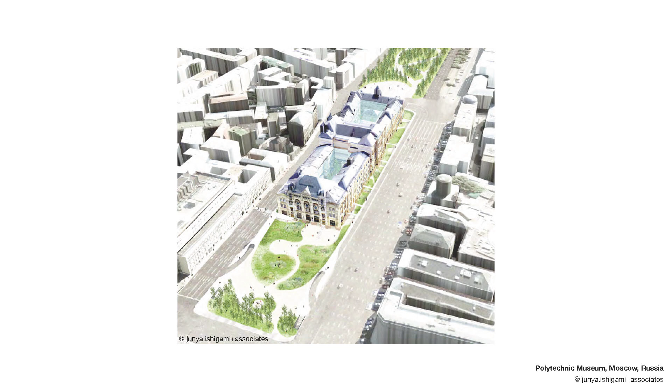So in 2013, I came for the internship first, because of the Polytechnic Museum project, since Junya won the competition in 2012. At that moment, I was mainly interested in urban design. This proposal was probably more urban than architectural — it was connecting the garden and extending it under the museum. So it was very unique.

I thought this was a very unique design proposal for the city of Moscow. I was interested in how this person designs such a thing, his vision, how they design such a thing. So I applied for the internship, and had an internship first in Moscow for 1 month, working inside the museum, and then 2 months in Tokyo. And this is the office when I came to the office.

Okay, so you see it's me, and this is Kei, and this is Ishigami. And in the office, the main work goes through the models. Basically, every project is designed through the models.

That's why you see there are many big scale models for different projects. At that moment, we were just 3 interns, so our main work was to help staff design and make those models to explain the project. This is the Polytechnic Museum model, which I was working on during my internship. This is design staff, and we were trying to design inside the model while completing it, and at the same time discuss with Ishigami. So lots of model making was during the internship.

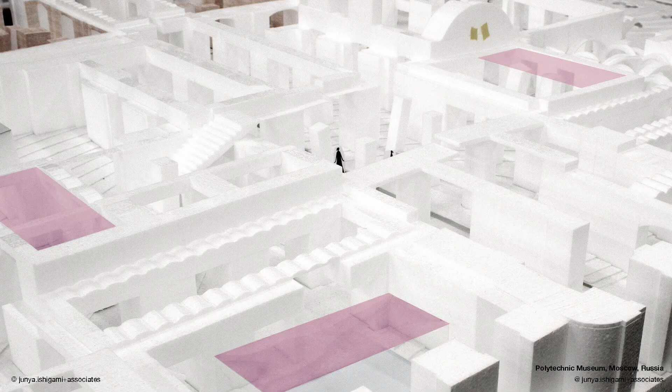The models are very precise and detailed, so we can also use them for the client to explain the solution. Also, I think it's important for Ishigami to design through the models because we see it more real compared to 3D modeling - since the eye is not focused on the back, we see it very much like we see the actual building. It's also very easy to understand your design and if it's good or not.

Then the second project I was working on was also a model for the exhibition - it's another project which Kei will explain later. We were making the model, not small scale, made out of paper with some plants on top. We also delivered it to the exhibition space.

Then my internship finished. I went back to Moscow, finished my master's, and in September 2014 I arrived at the office already on staff position. My 5-year period in the office I split into 3 stages, so it's more clear for you, and I think it was kind of going step by step up. The office right now - I think I'm the longest international staff working in the office - so I think it was a good opportunity to see different processes.

First, every person who starts in the office begins with a competition. I think competition is a very good chance to show what you can do, and also to see how design works in the office. Ishigami-san always judges - he really sees what a person can do, what their design sense is, what is good to offer them for the next project, and so on. So for me, it was a chance to show my best.

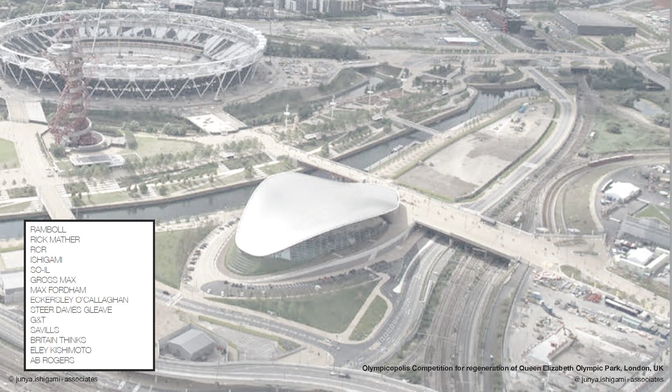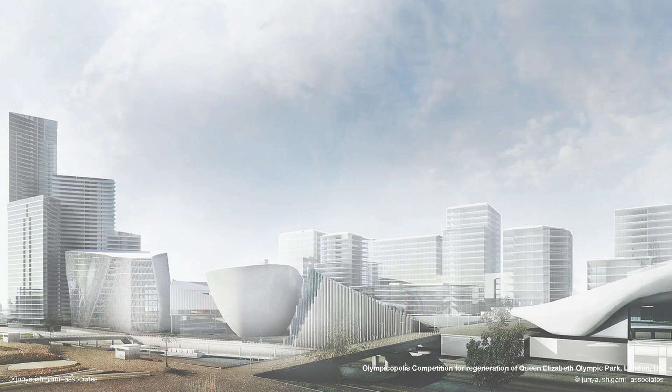Unluckily, my competition was very big - we were working together with several architects, including RCR, the Pritzker winner, and Sou Fujimoto, and Rick Mather was our British partner managing this competition. The competition was for design in an urban area. Several architects were designing buildings - we designed a gallery, RCR designed the museum, Sou Fujimoto designed the university, and there was a big residential area. We designed this small gallery space. We submitted and didn't win, but we succeeded in the submission, and Ishigami was very happy.

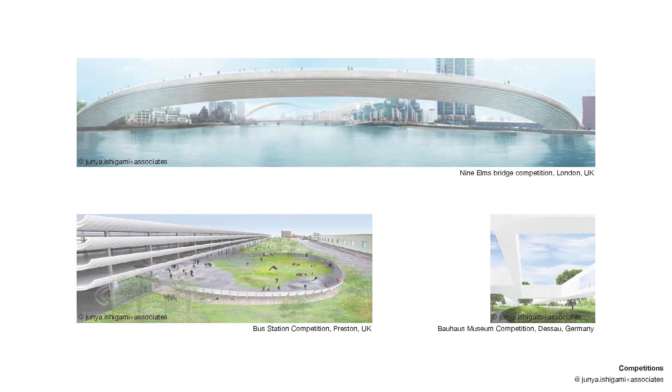For me, probably it wasn't the best way to make it good, because after that Ishigami pushed me into many other competitions, especially some that weren't under my control, but he put me in order to deliver to the final stage. So maybe in the first year, we completed around 7 competitions. Competition after competition was a very hard period, I think the hardest one for me, and the whole office didn't sleep and so on.

But I think the good point is that I always understood competition is the only chance to design something you will probably never design otherwise - for example, a bridge, or a renovation, or a museum. Of course we never know what our private projects will be, but competition is a fast way to design and try to understand how things can be created.

Then another project, already probably in the 2nd year, was the exhibition in GA Gallery. GA is a publisher, a Japanese publisher - they have something like Project Russia in Russia. They have a gallery space, and they publish a magazine with current architectural projects every month. So they select several architects and have an exhibition.

Ishigami presented his project, a Denmark pavilion - a very big space on the water. My team made this model, and we delivered it to the exhibition, but also designed the exhibition space. This was important because presentation models are another level for the office, and Ishigami-san cares very much about quality - it should look like a building, but at a very small scale. Everything was important, like making the building reflect in the water, since it's on water - it's acrylic and semi-opaque so it reflects the building. So many details. I also learned how to make final quality models for the office, and we published the project - my first experience making a publication for a magazine about this project.

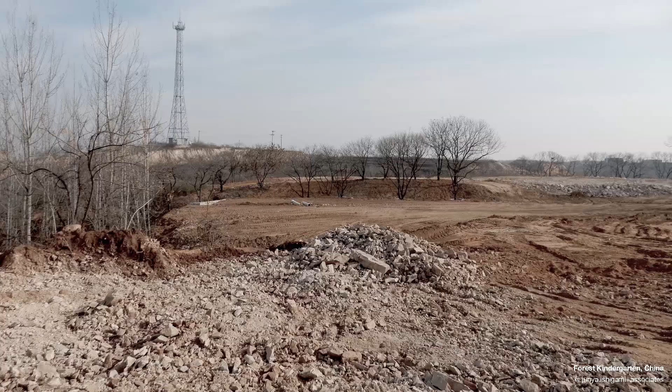So I'll explain how the design process works in the office based on the kindergarten project. This is the site. Usually any project starts with a site visit, because seeing the site is very important - to see the scale, the environment, and for Junya, it's important to understand how to put the new proposal inside the environment, how to merge it together. But in this case the situation was different because it's a new development area and a very, very big part of land - nothing happened yet, they cut all the trees, so it's just the ground.

So we didn't really know what to do in the beginning. But for any project, Ishigami never draws first. It's good because he asks you to propose - you're the staff with a team of interns, and everyone starts to propose. Every day we have a meeting and propose around 100 options, then Ishigami-san refuses them all, or something like this. Then you try again, and he chooses some direction. For just a meeting with him, we present the plan as a more or less draft arranged version, along with the model, because he really sees more in the model. It was a lesson for me that drawing doesn't present as much as models - models have some craftsmanship mistakes, but sometimes these mistakes are good because the shape becomes better, not perfect - not made by machine, made by hand, so it presents well.

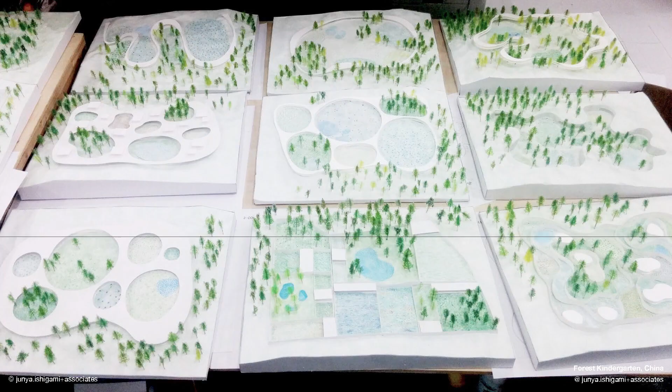Then we presented 17 options - here only a few - for the client. He chose some, but at that moment, together with Ishigami-san, we started to think we wanted to design the building for the kids, not looking like a normal building. I think any kindergarten is designed by adults first, and second, it has the same architectural scale as any other building, so it doesn't really create something for the kids. So we wanted to challenge that and make a space specially made for kids, very unusual for adults.

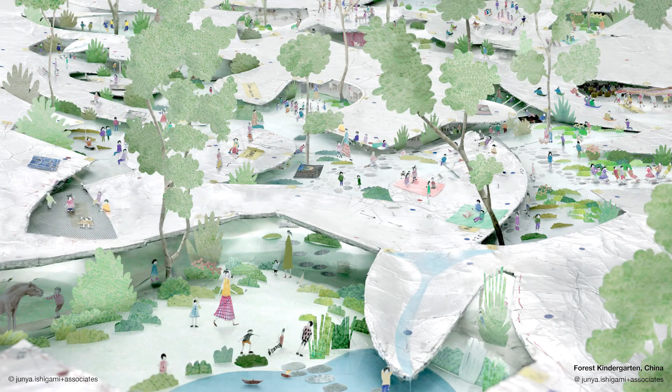But then we were trying to find the shape which would be playful for the kids. At the end, yes, we found the final shape. So this is the final shape, and here you see the image presenting what the project looks like.

So we wanted to make a roof very playful, and you don't even see the interior spaces, but they exist. The roof uses the rainwater, so there's a pond that appears, there's a net play area, and many different places, all mixing in the kindergarten.

Last year, the office had an exhibition at Fondation Cartier in Paris, and we joined this exhibition. My team and I presented the kindergarten project as well, showing collages, first roofs, study models, and then the final model in the central space.

Then I think the last period in the office is the supervising period. It's also when I started to think about maybe leaving the office, but more about finding the next step. In this process, I started to have many new staff who I had to educate to handle different projects. For example, Cafe Paris or the Jewelry project, I was just supervising as a project manager, but staff or interns were delivering the presentation to the client or going to the site and so on.

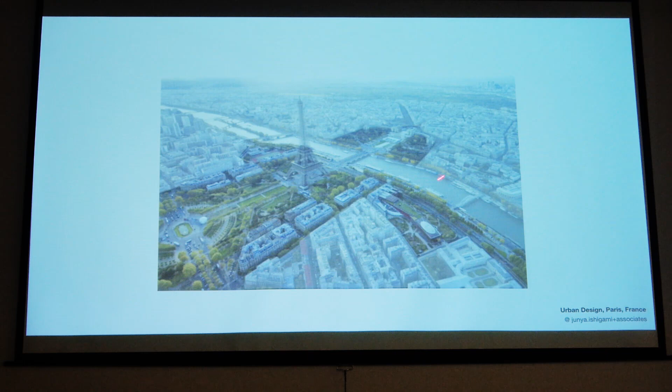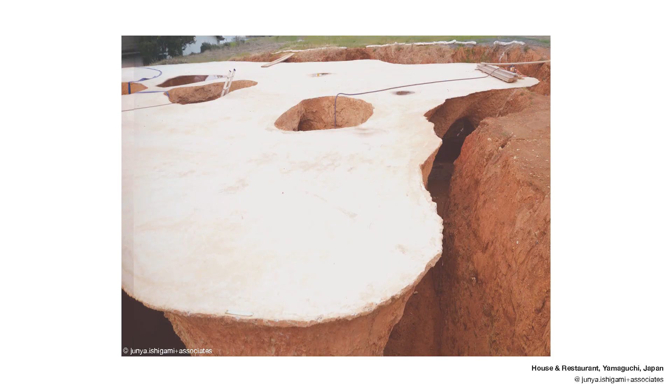And then I think I'll pass the word to Kei. He'll explain more from a different perspective. I think my perspective is more about project management, managing different competitions, international work, and his is more about the practical experience in the Ishigami office.

In my 7 years at the Junya Ishigami office, I joined many projects. So today I'll choose several unique projects from the office.

This project is the house and restaurant. The client is the owner of a French restaurant, and he's the chef. His family's house and restaurant is this one, and it uses a very unique construction method.

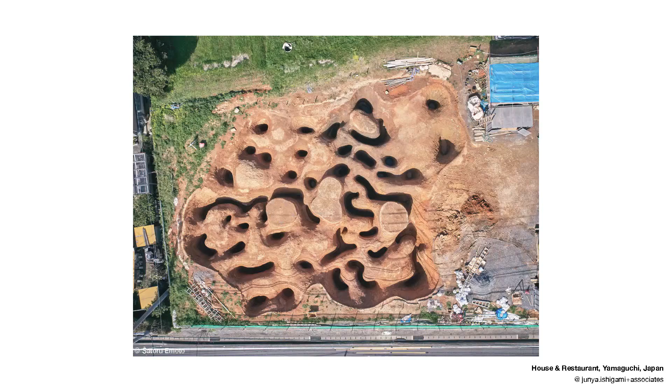So first we dig the soil ground and fill with concrete, then dig out the soil. This is the interior perspective, so all the surface of the ground is reflected in the concrete. It's a very unique concrete building.

The client's request was first that he wants it to look like an old building, like a winery in France. We proposed this ancient but new building.

This construction was very hard because we designed the soil. So I joined the construction site and also joined the digging. I talked with the contractors about how to dig and how to make a good surface, and which soil to keep and which soil to make smooth. So it was very hard to control that construction site.

But at the same time, it was a very good experience for me to join this project, because we cannot imagine what's happening at the construction site, but we had to concentrate on the design at the same time as the construction. So we noted many things at the construction site.

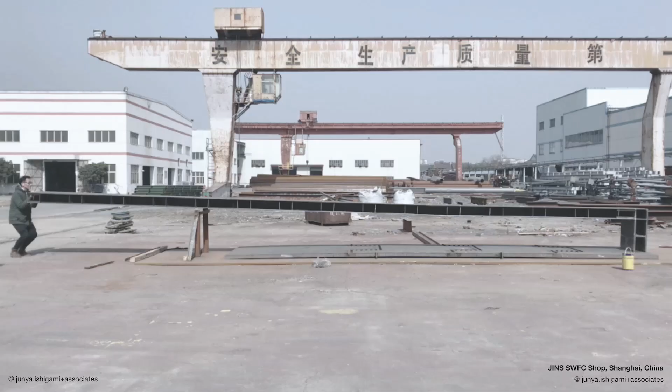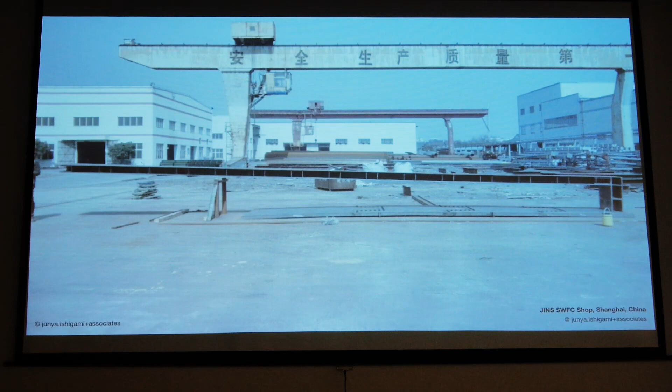So this is the wall supported by the cantilevers, and in this project we check it by building a one-to-one mock-up. In China we asked the contractor to make the one-to-one, and we check how the structure works well and how to make the smooth surface.

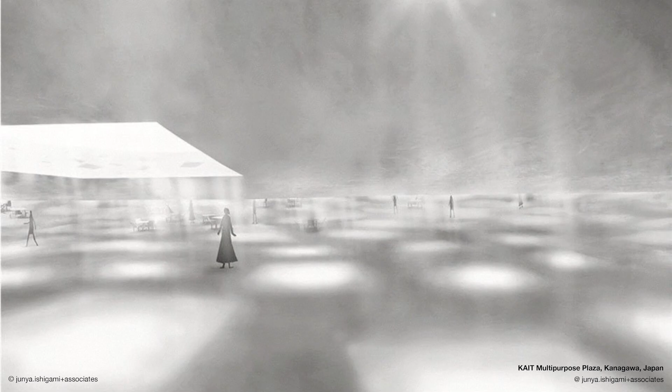And this project is the Kanagawa University Plaza, located next to the KAIT workshop, Junya Ishigami's project. This project is about 100 meters by 50 meters, with a 12 millimeter steel roof without columns. This structure is also very hard because there's no column, just 12 millimeter steel, supported by the surrounding wall.

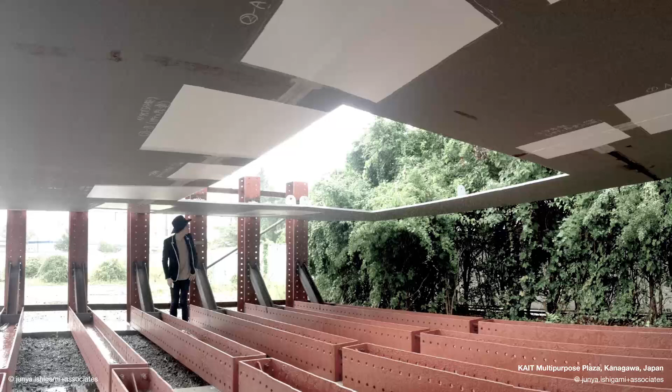In this project we also made a mock-up, and we checked the finishing surface, how the welding works well, what kind of detail for the opening edge, the lighting conditions, and the rain, how the water drops on it. Junya also visited the mock-up and discussed with the contractors how to make the shape more smooth.

So 2019 was a challenging year, because working with Ishigami office is of course very challenging, but at the same time I think we started to realize both of us had very different experience in the office. It became very beneficial to start thinking our own way, because Kei's experience is very detailed and construction-side, and mine is the opposite. So we started to think about why we should join the office together.

Also, in Ishigami office there were many cultures, and Ishigami always asked us to design for different contexts. I think right now we have to design spaces for different values, since all people request many different things, so cultural values are also important to mix into the proposal.

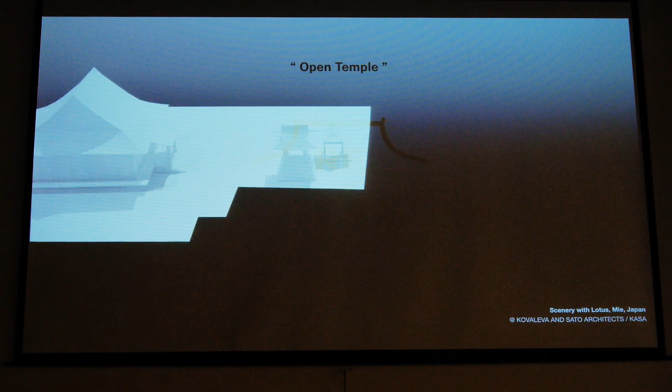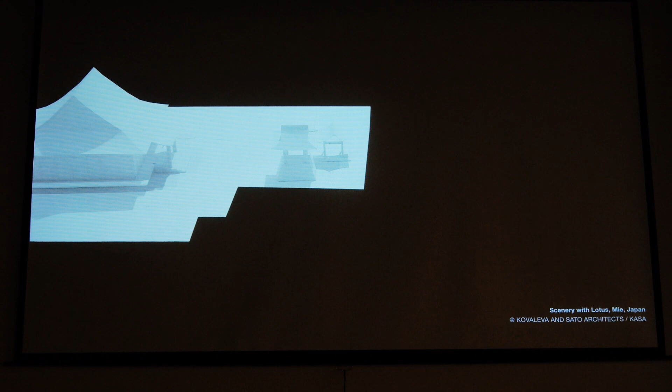Here you see the existing temple. Each Buddhist temple in Japan has a gate—it's a symbol. Now the client, in order to promote the temple, organizes different activities, like yoga in the temple, a kids workshop, and other things. But no one comes who doesn't already know about it.

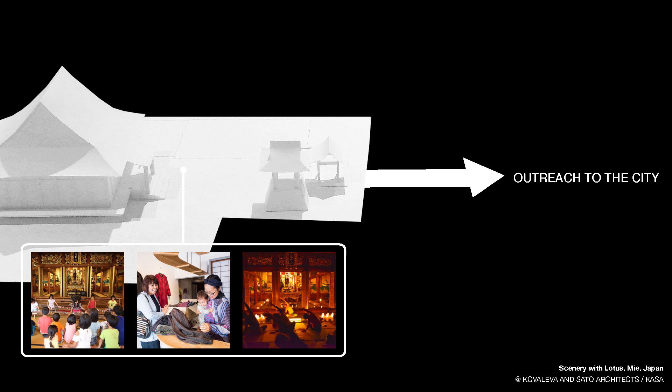He's really concerned about that, so he decided to extend his activity into the city and bought a building located just in front of the temple. He wanted to use it for different activities not connected to the temple, like a cafe, library, or guest house—something very open for the city. This building also faces a very old historical road and is on the way to approach the temple, so it's a very important location.

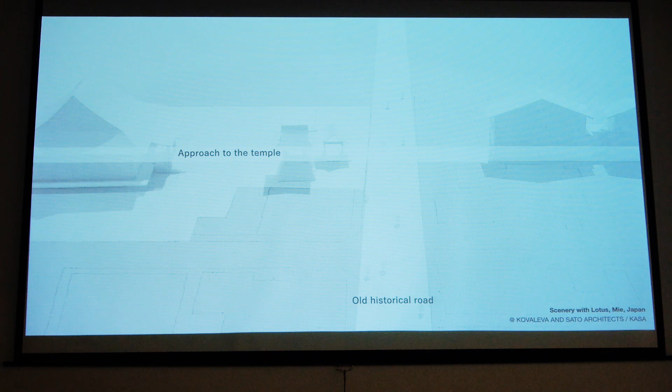Our site was actually very small, just in front of the building. The client came to us saying, 'I want to design something that people will understand is related to the temple, but also something people will like as a space.'

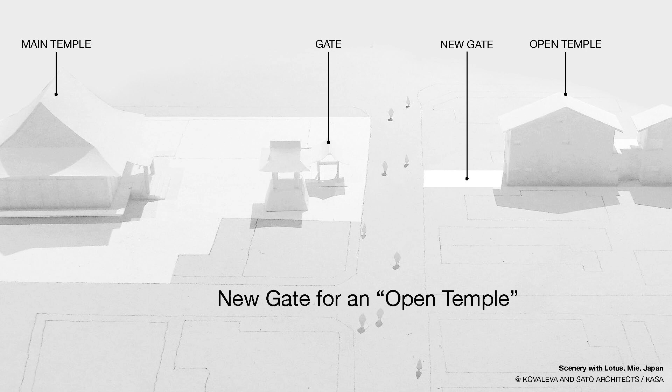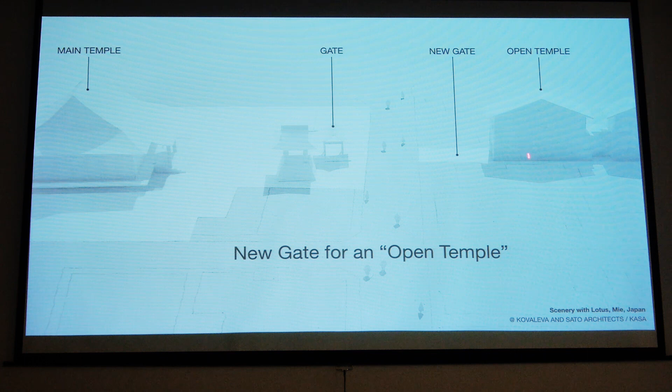As I said, the temple usually has a gate, a symbol for the traditional temple. For this new temple, we decided to design a kind of new gate, but as a pavilion—a symbol for the new, open temple. In this moment we faced two issues: we had to create something symbolic for the temple, which was important, but not too religious, while also making this new space something anyone can use and anyone can see.

So our project, called Lotus, is a pure scenery. Why Lotus? Because the lotus is a very religious symbol for Buddhism, and it also has a very beautiful shape. Also, for me as a foreigner, there's the image of Buddha with the lotus beneath him. So the lotus has a lot of meaning, and for Buddha it represents a space.

We decided to design our architecture not just as architecture, but also as scenery. So if you see it from the temple, the pavilion looks like the scenery of a lotus. For the temple, it becomes not just architecture, but a new image or new symbol. At the same time, when you're inside it has a space formed by two roofs joined together, and you can see it repeats the shape of the gate and the temple, becoming the same architectural language as the temple.

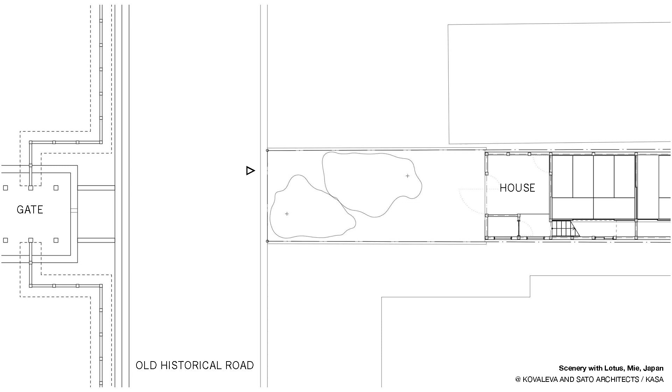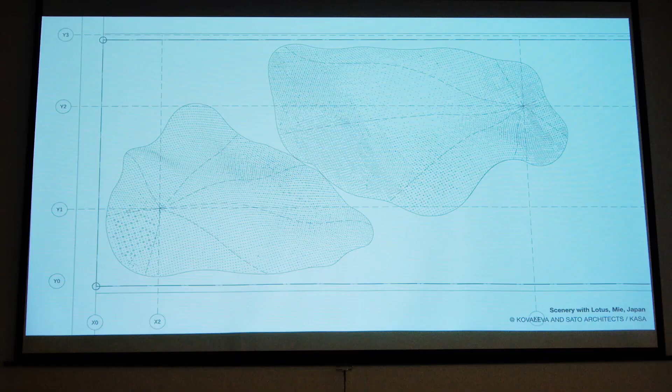For example, above the seating space, the holes are very small—only 2 millimeters—so water doesn't get in, but light still comes through. So it looks like stars when you look up with the light.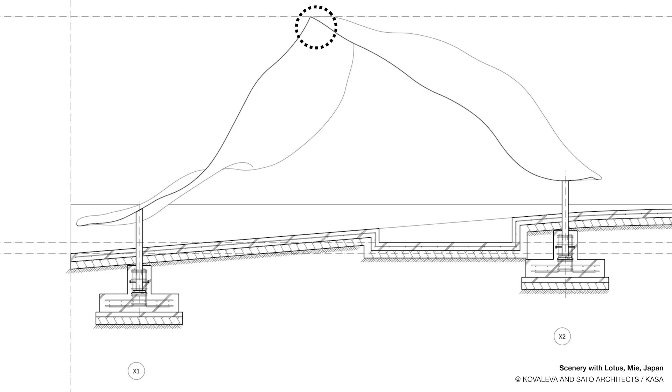And the highest space is 4 meters, with strong light coming from the opening itself, only 1 point. It was important for us to design this roof very light. In Japanese temples there is always the curtain and the entrance which has a very light feeling. So we wanted, in order to make this perforation, the building to not be massive. And also the light which comes in is more like light in a forest, so when you are under the temple, under this roof, you are covered with light.

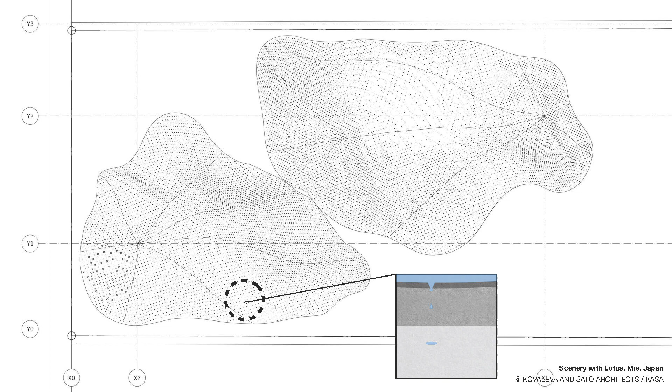Another space is where the water stores, same as on the lotus, we collect the water and then drop by drop it's coming down.

And also if we see from the new building, for now there will be a cafe, but different use. So first we also have this peaceful scenery protected from the road, but then it's more like a landscape scenery from the tatami space.

And structurally, the first principle was about folding the piece of paper and shaping it so it becomes very strong. So it's 4 millimeters aluminum and an 8 centimeter column supporting it. It's two roofs joined together.

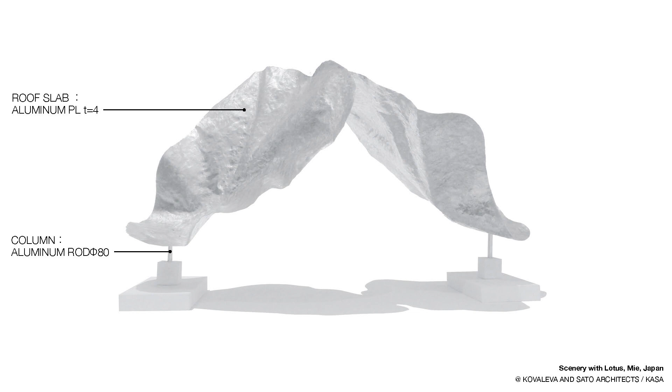Structurally, where wind comes, it works like a mountain structure. And then where the wind is not that strong, only a cantilever helps to support this roof.

For the design of the halls, we generally work with a structural engineer who also works with Junya, Jun Sato, and he's crazy, he can do such things I never imagined could happen structurally. So if you have some crazy ideas, be sure he can manage to find the structural solution.

Structurally, the way we make it is also kind of unique. There's a fast train in Japan called Shinkansen, and it has a very big mouth, the nose, and it's made by a machine which folds it. So we also use the same method.

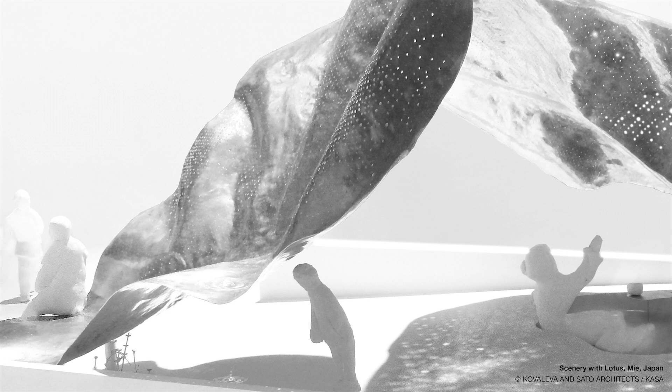But in our case, we first cut aluminum, then punch in the holes, then by machine, but also by handcraft, we shape each piece, and then we join by welding and sand it. Then here you can see the overall image of the pavilion with all the lights and the details.

Then, the SD review we just completed last month, so it's an exhibition. I will explain. The SD review is the award founded by Fumihiko Maki 40 years ago, and it was mainly made for having the...

...discussion for the architects in the moment when they still design the project. I think many architectural exhibitions present the complete works, so it's more about your result. But there is no exhibition which, same as a university, you present like a midterm studio, then you can change something, but more like architects. So we never know how architects are actually designing, because I think every architect has a very unique way to design, so it will be interesting to see. That was the idea of Fumihiko Maki, to make this exhibition and then also a publication of each project.

So every year, around 300 people apply. There are no restrictions, not so many. Only your project has to be actual, you have to have a real client, and then it has to be not built yet, so on the way to deliver. Then 15 people are selected as finalists, and the 15 people have the exhibition in the very center of Tokyo, and then also in Kyoto. This is the opening day when we opened the exhibition, and then Fumihiko Maki presented each finalist.

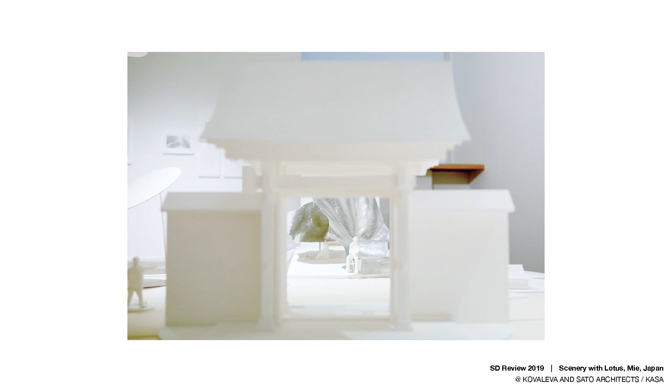And then the structure, one-to-one, and so on. So for us it was challenging to design, to make the story inside the space. Here you see the concept model of the lotus pond and the Buddha, and the site plan with the temple and new pavilion, the wall, and the view from the gate, because that was also very important to show to visitors, so they can actually look down and see how the pavilion looks through the gate.

And then also the shadows and the sitting space, the structure model. There were two models, one-to-one, presenting the quality of the light. The first one, as I showed before, like in the forest, and the second one is very unique, just like one drop on your hand if you place it under the low part.

So that was a good experience, I think, because as self-architects we are very young, but we could show our project in the same space as people who have much bigger experience. So it felt important. And I think for young architects it's very good, in order to show not only how you design, but to see how other people design.

Then Kei will explain, we have a second project as well. It's right now in construction, and it's a housing project.

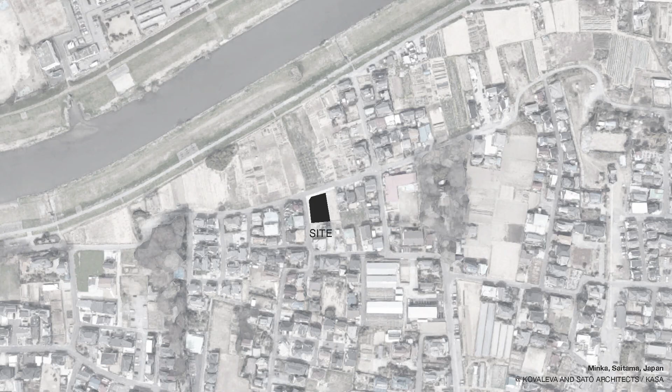Minka project. This is the site plan. The site is in the Saitama area, one hour from Tokyo, not really a city area. Here is the river, and we see the rice field and farmer area and the forest of the shrine, and this is the site. The site is actually quite big for the residents, the housing.

This is one block, so six housing units are here, but this is our site. It looks like a one block scale, so it's very large.

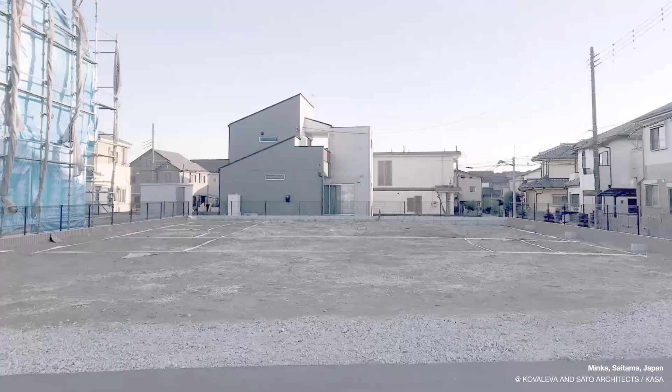When I visited the site, we wanted to make the housing, the land, as a building. And the client requested something with an old Japanese atmosphere. The client works in a lifestyle, a farmers' lifestyle event company, and they want to import that activity into this house.

So we first researched the primitive farmers' life, like how Japanese people were living in the house. The left one here is the warmer area house, basically the south area in Japan.

So there the floor is elevated to release the humidity. And this one, the right one, is the colder area's house. It's dug in here to protect from the coldness. But this one is like a 3,000 year old building, so we cannot directly import this building.

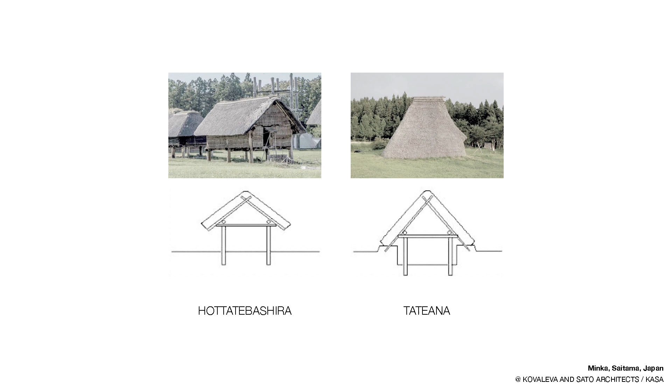But this picture is like a kind of middle age, modern Japanese traditional house. This building has both elements, the elevated floor and the dug-in area. So these two elements are joined by the big roof, so both interior activity and exterior activity are merged under the big roof.

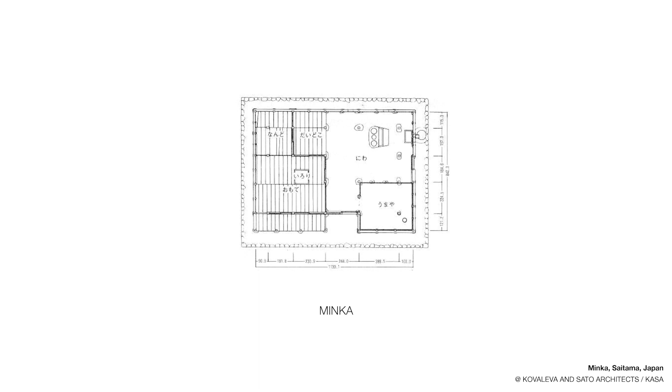So this is the plan of that building. Here is the elevated floor, which should be like interior activities. Here is more like exterior activities. An interesting point here, they call it niwa.

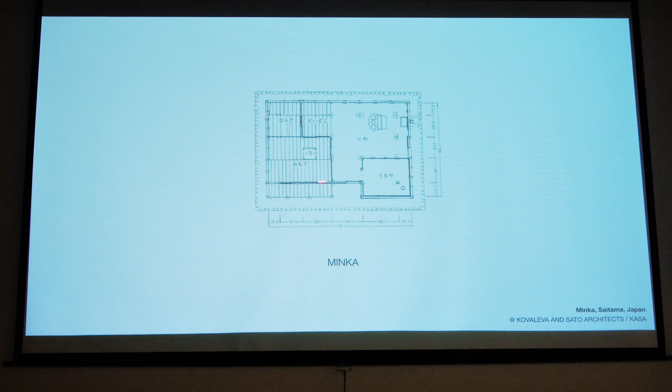Niwa is the modern word meaning garden. So it means the old people regarded the garden as an interior space, included in the house. We want to export that concept of the lifestyle of the farmers. So this is like the old house, and the elevation is made by the roof. So the roof is not just the roof, the roof is more like a facade of the building.

So our proposal is this one: they have a big roof and a closed wall. Actually the client wants this space, this building, as a closed building, because in Japan, as Sasha explained, privacy is very important. So they don't want to allow people to see the inside from the exterior.

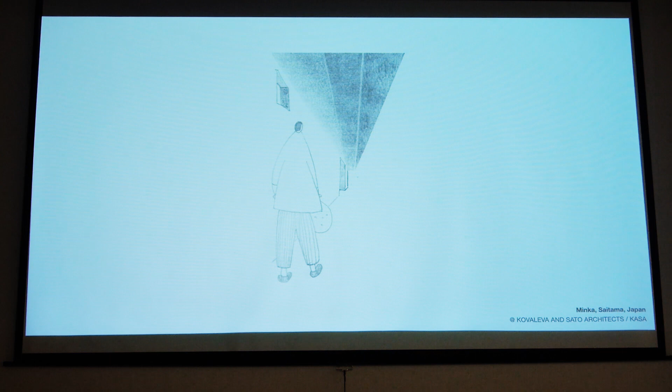So the building itself from the outside is very closed, but in the inside, from under the eaves, the interior is like this. So we see the very beautiful sky without any neighborhood. It just cropped the sky by the roof.

And here is the interior view, but we want to treat the interior, garden, and semi-outdoor space as no hierarchy. So we want to treat them as the same.

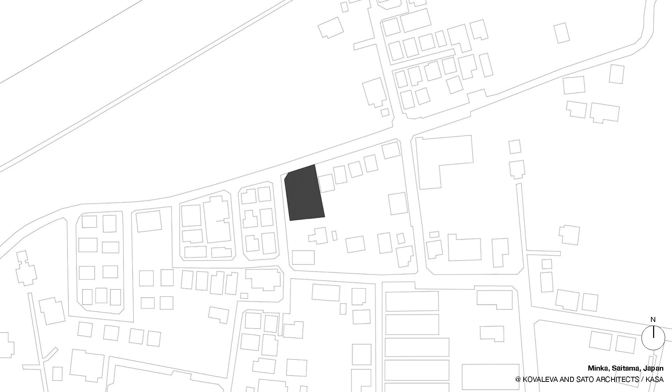So this is the site. Main road is here, and street is here, neighbor is here, and our site is like a corner. And our plan is like this.

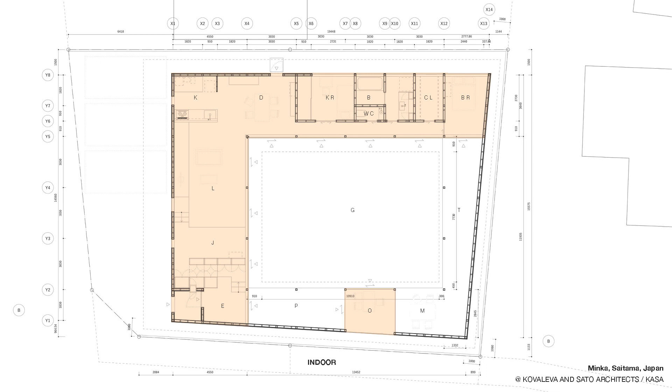So roof plan is like this. And plan-wise, here is kind of the public space—entrance, tatami room, living room, kitchen, and the garden facing the living rooms, terrace, playground, office, and meeting rooms here. And more like a private zone is here, like the kids' room, bathroom, toilet, closet, and bedroom here.

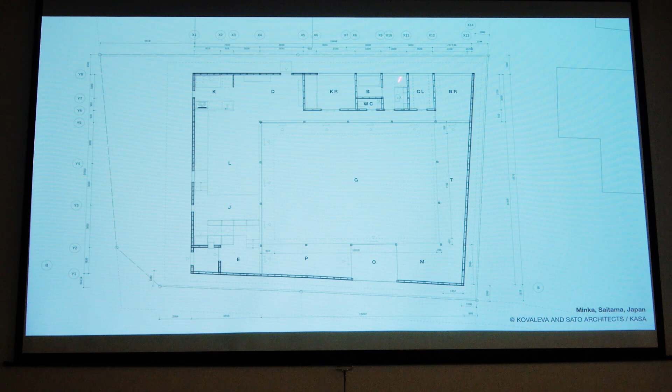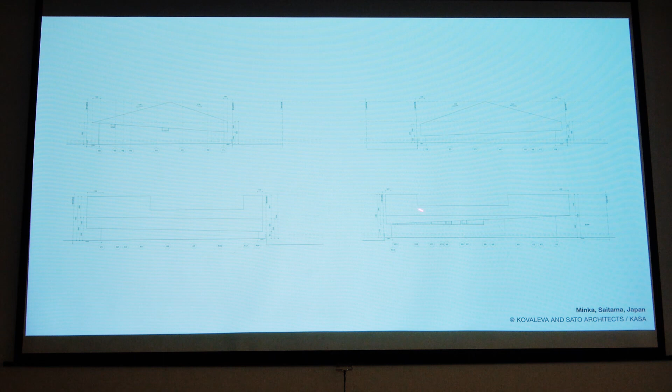And the elevation—four elevations are different, depending on the environment. One is the triangle roof facing the park, one is lower with a protected view from the outside, one has no windows here, and here is the window for the private room, but it crops the view from the outside.

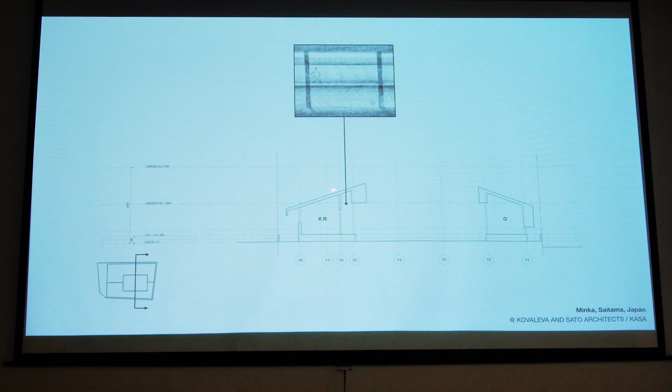So here are the sections and perspectives. We see from here the indoor, garden, and office as no hierarchy, treated as rooms. The entrance space has big roofs, space covered by the eaves, and it looks like a space. Once you go into the living rooms, we see the very good sky and a very big space here.

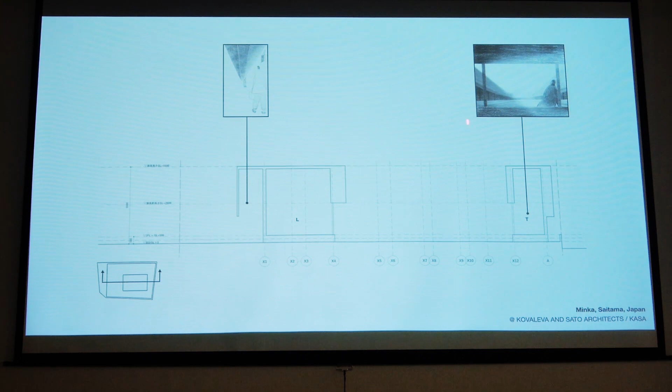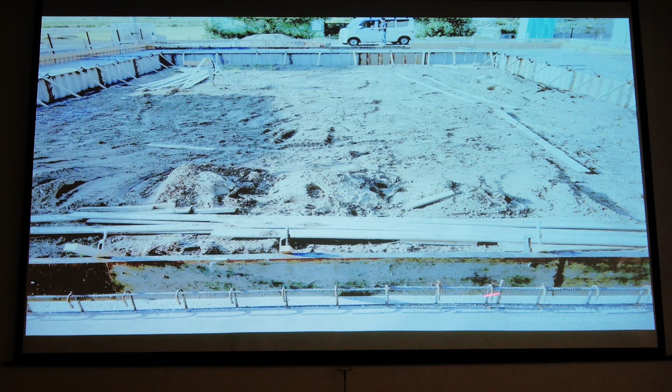So this is some ceremony of the construction. And this is the foundation construction. Here is the foundation, so this is going to be the garden.

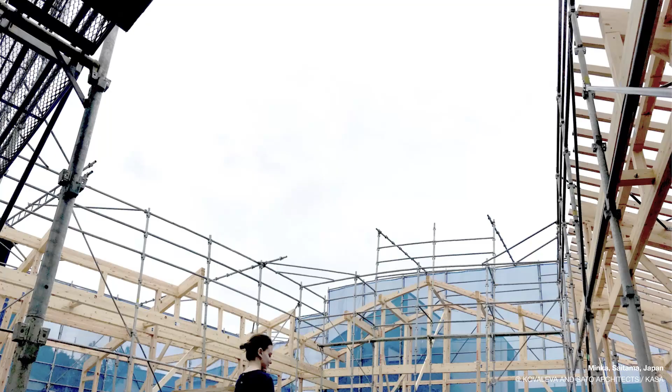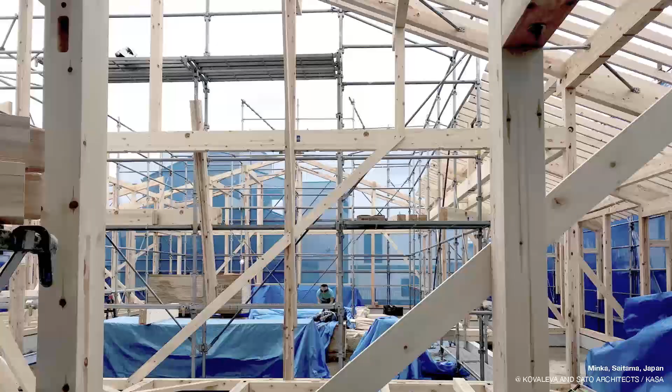So this is the courtyard. As you see, this is the neighbor, but we crop the view, so we don't see the neighbor, and also the neighbor cannot see the private garden. So this is from the living rooms.

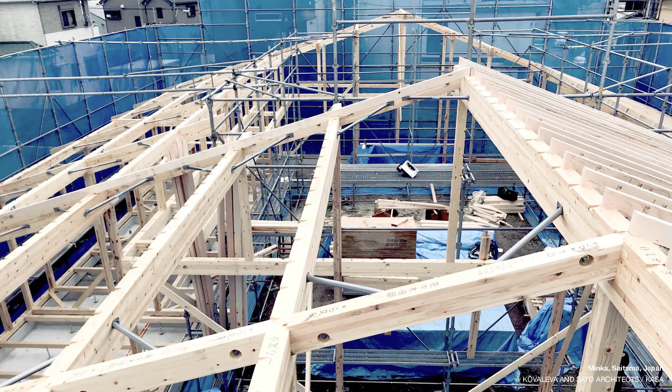So, yes, on that moment, I think—of course, our story is not complete, but for now it's complete. And I think this year, next year, for the next 5 years maybe, we want to focus not only on making the project.

Of course, realization for architects is very important, and for Junya it probably takes a bit too much sometimes, but the experience of construction is very unique, and many things change during construction as well. So you have to pass through this process to understand how it works.

But at the same time, we want to focus on the philosophy, because we were discussing that issue with Ishigami one time—because recently not many architects are thinking about the philosophy of the work they're doing. It's not only about completing projects, it's also about positioning yourself as an architect, not copying or trying to make something that already exists, but always facing the question of why we do it ourselves.